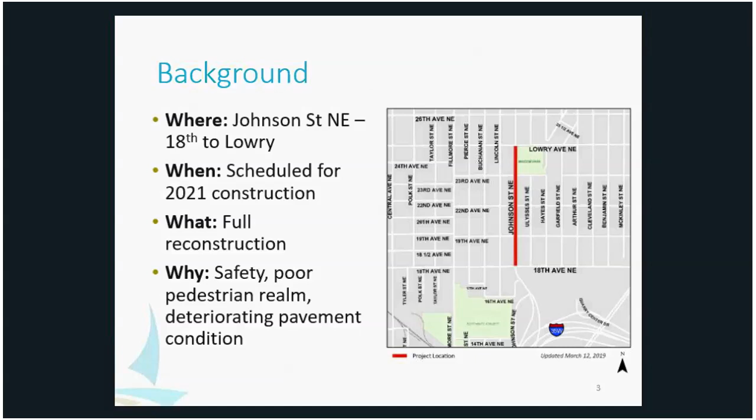Project schedule. Reconstruction projects have three big phases: the conceptual design and layout approval. That's the stage we're in now. Then it moves on to the detailed design, the nitty-gritty engineering of a project, and then finally moves into the reconstruction phase. In the conceptual design phase, this is when we decide overall what's between the curbs. Are we going to have parking? Is there going to be a bicycle facility? So these are when the big, large decisions are made.

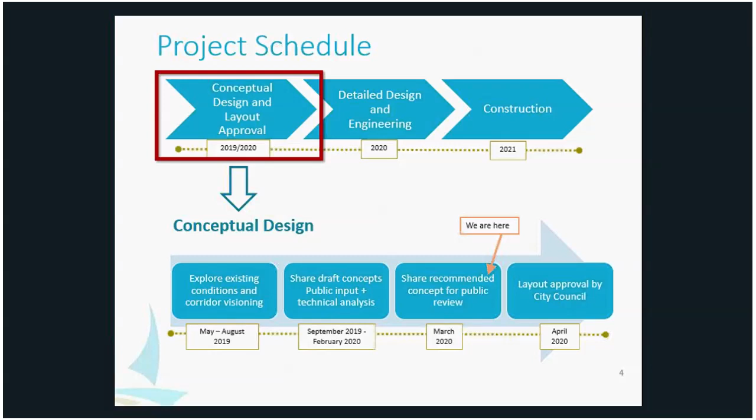You can see some of the more detailed steps for this process. The thing to note here is that this project did start back in May of 2019, and we are at the very end of our conceptual design process, where we're recommending our final design to the City Council for layout approval.

Wanted to highlight some of the project engagement that we have been doing throughout this process. As I said, we started back in May of 2019 with visioning. We shared our draft conceptual design in September of 2019, and since then we've been doing a lot of outreach and talking with stakeholders.

We've had multiple meetings at the Windom Park Citizens in Action Group. We've had 2 open houses, meetings with our pedestrian and bicycle advisory committee, door knocking to businesses in the corridor, online surveys, and then finally participating in a stakeholder listening session that was convened by Ward 1. So lots of opportunities to have good discussion with stakeholders in the corridor, and our design, I think, has gotten better as a result of those conversations.

This slide shows the existing street as well as our recommended cross-section for our final recommended conceptual design. As you can see, out on Johnson Street today, it's a fairly narrow sidewalk, from 6 to 7.5 feet, with 2 parking lanes on each side and 2 14-foot travel lanes. The recommended street includes a shared use path on the west side of Johnson that ranges from 10 to 12 feet. A shared use path is intended to serve both bicyclists and pedestrians.

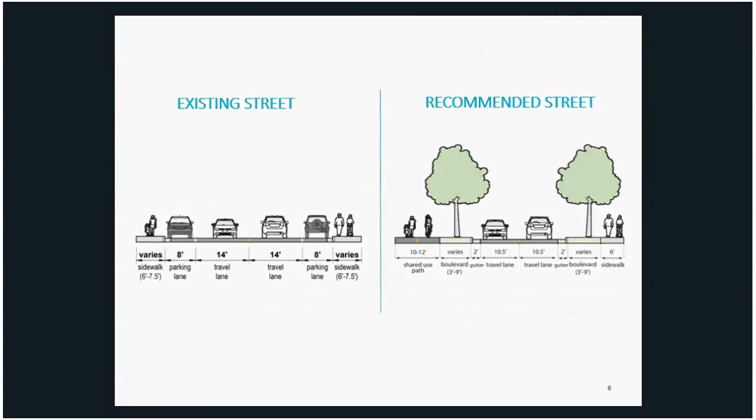So why we are recommending our design. First of all, we're recommending it to provide a safer street. Johnson Street Northeast, this section is on the city's high injury network. That was established as part of our Vision Zero planning process. The high injury network is where the city sees the highest concentration of severe crashes.

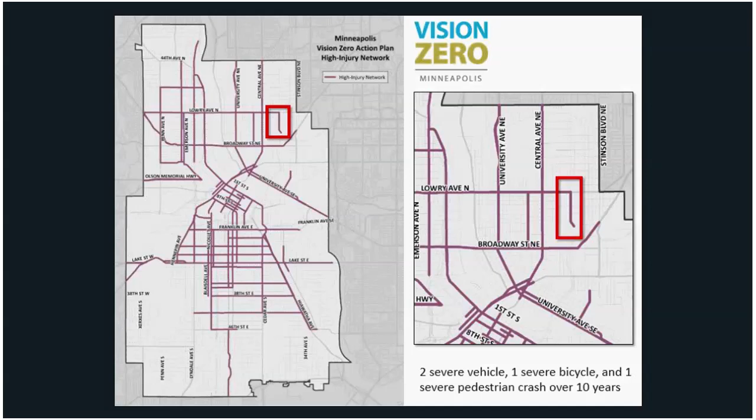Over the last 10 years, Johnson Street has had 2 severe vehicle crashes, 1 severe bicycle crash, and 1 severe pedestrian crash. So this reconstruction project is an opportunity to put in design features that will help make this street safer for all users. So that's one important backbone as to why we're recommending the design that we are. Another reason is to provide street space for greenery.

Throughout this entire process, whether it was during our visioning or when we were presenting our draft conceptual design that showed the wide boulevards, we've heard from stakeholders that they're looking for more opportunities for greenery on Johnson Street. And with this design, we're really providing that. It also gives us the opportunity to plant large boulevard trees that will help add shade and coverage for people using the street. And lastly, we're recommending this to provide a safe bicycle connection.

During our process, we heard kind of competing thoughts on this addition. Public Works is recommending the shared use path. First of all, because on Johnson Street, it will be a critical link as we build out the city's bicycle network. There's already an east-west connection on 18th Avenue Northeast at the south side of the project that will be further built out to the east as 2021 reconstruction kicks off for 18th Avenue Northeast. And then in 2023, it will connect into the county's Lowry Avenue reconstruction project that will also have a bicycle facility.

Given some of the other city policies, the fact that the city announced a climate emergency, our transportation action plan that calls for moving people towards alternative modes of transportation to help fight climate change, we saw this as a necessary step and addition to take within this project. However, of course, there are trade-offs. For the large majority of this project, we are recommending parking removal throughout the corridor. There are some spot areas where we are keeping 17 on-street parking spots, but we are removing a large amount of parking that exists out there today.

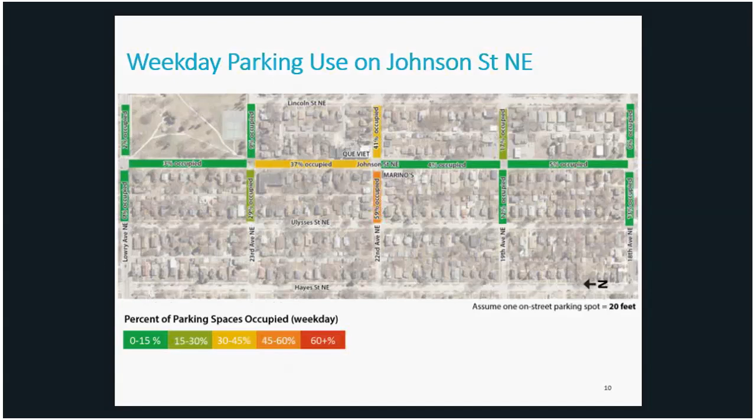After we spoke with businesses when we presented our draft conceptual design that only included 12 on-street parking spots, we dug a little bit deeper and did some more weekday lunchtime counts to assess what the peak usage in this area was. And from this slide, you can see the existing spots that are out there today. So there are 35 on-street parking spots in total between 23rd Avenue Northeast and 22nd Avenue Northeast. At the peak period, the lunchtime parking, we found those were approximately 59% occupied. So that's about 20 cars.

But you can also see that the side streets, while fairly heavily used, still also have some availability. And then the block to the south, again, very low usage on that block. So again, about 20 cars using those spots in the peak period. While we know that if everything was parked up 100%, we would not be accommodating that with the new design, we are including 17 on-street spots. Alexander will walk through where those are.

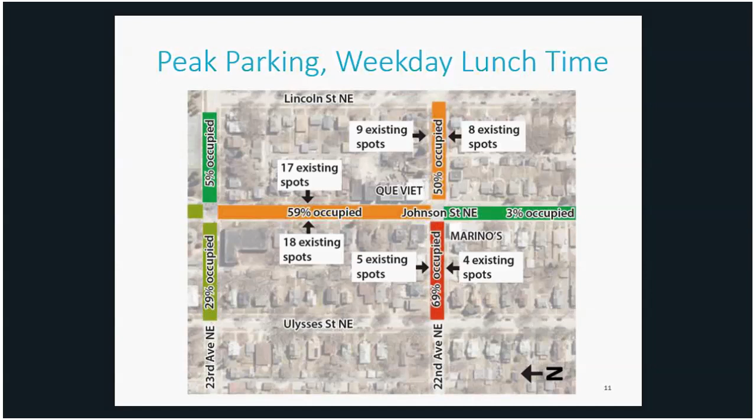And so the large majority of the cars that use this area will be able to park on Johnson Street during the peak period. So we know that there's a trade-off there with removing parking, but based on this data, that is how we came to our number of recommended parking spots in our conceptual design. So I'm going to hand it over to Alexander to walk through the details of what we're recommending.

Thank you, Liz. So the recommendation starts with the cross sections. Liz talked about these. I have these pie charts up here just to show kind of the modal shift or the balance we're looking at from a mode perspective. In its existence, about 3/4 of the street is allocated to cars and 1/4 to pedestrians. With our recommended concept, we're shifting that so that now we have 21% greenery, so that's boulevards, 36% bike ped from 24%, and then reducing how much the car consumes within this right of way from 76 to 43.

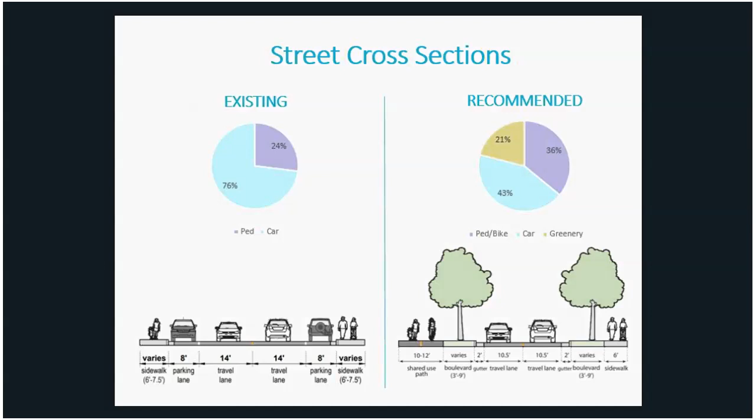And we're doing this, as Liz alluded to, with our policies, Complete Streets policy, Vision Zero, climate action as well, to just try to provide a more multimodal experience along Johnson. And moving into the actual streets of Johnson, I'm going to start with the 2300 block of Johnson Street. This is kind of the starting point of the project.

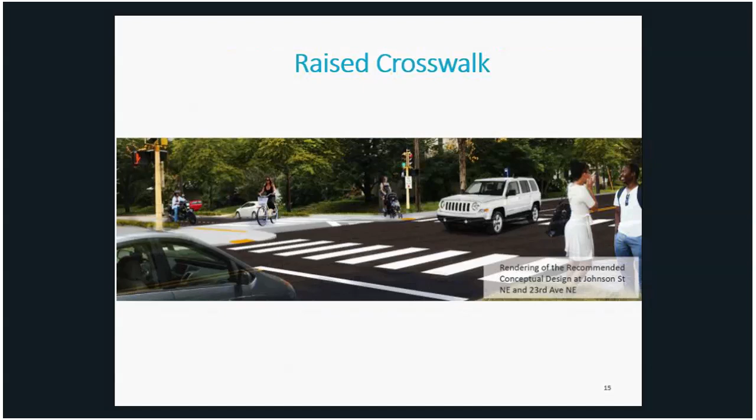Moving on to the 2200 block of Johnson Street Northeast. On the east side of the street, you'll see a 6-foot sidewalk, 8-foot boulevard, and then you'll also see 12 proposed parking spots. And in this location, we're reducing the boulevard to accommodate those parking spots. As Liz alluded to, the inclusion of these spots is to accommodate this business node and the restaurants in this corridor that do utilize that parking.

Looking at the west side of the street, you'll see the shared use path with a pretty consistent 10-foot width. You'll see at some parts the boulevard goes from 6 feet and then reduces to 0 feet. And the reason for that reduction in boulevard is there are retaining walls at some of these properties that reduce the street width we have to accommodate this treatment, and we had to reduce the boulevard in order to still accommodate the shared use path.

Also looking at 22nd, there's been a variety of treatment improvements that have occurred in this intersection over the last few years. Currently, they have a flashing beacon, and we are recommending that this be continued with the reconstruction. So after the reconstruction is completed, there will be a similar design treatment here with the flashing beacon that you can activate at the curb when you want to cross 22nd.

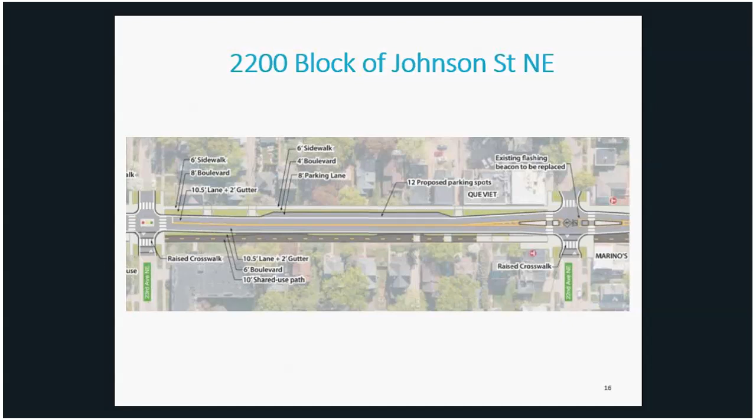We received a lot of feedback from the public through our engagement as to concerns with this treatment and potential conflicts with motorists and cyclists. And obviously this is a concern. We are introducing an intersecting treatment here. There are other examples in the city where we have bicycle facilities that intersect driveways, so it's not an uncommon treatment. And in this situation, it's designed in a way that motorists have in essence a kind of 2-stage process.

So if you're leaving your driveway, first you would cross the shared use path, safely navigate the pedestrians and cyclists and whoever else is using the shared use path. Then you would reach the boulevard, and then from there you would have a buffer to transition into the travel lane with the other traffic. So we're in this situation asking that motorists and all users in this corridor maintain caution.

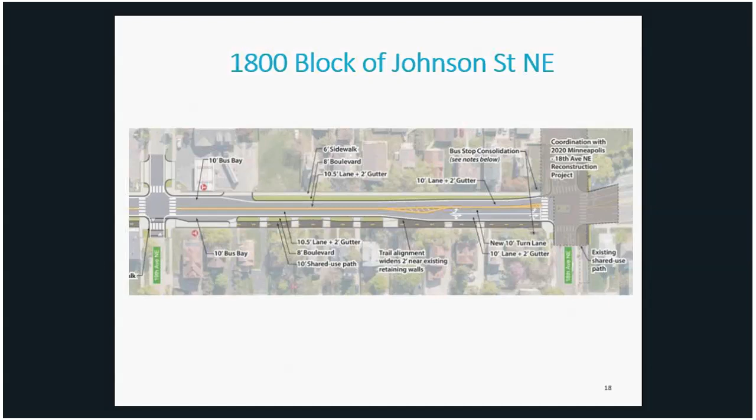Thanks, Alexander, for that overview. Next steps for this project. Public Works will recommend the project layout to the city's Policy and Government Oversight Committee. That's a new committee that has been created in response to the COVID-19 emergency that the city is dealing with. And more details about how that new committee structure works can be found on the city's website. Public Works will be recommending at their next meeting on Wednesday, April 8th at 1:30 p.m. And then after it is approved by that committee, if it is approved, it will be recommended to the full city council for approval on Friday, April 10th, and that meeting is being held at 9:30 a.m. Again, you can go to the city's website to find out more details about the new committee structure.